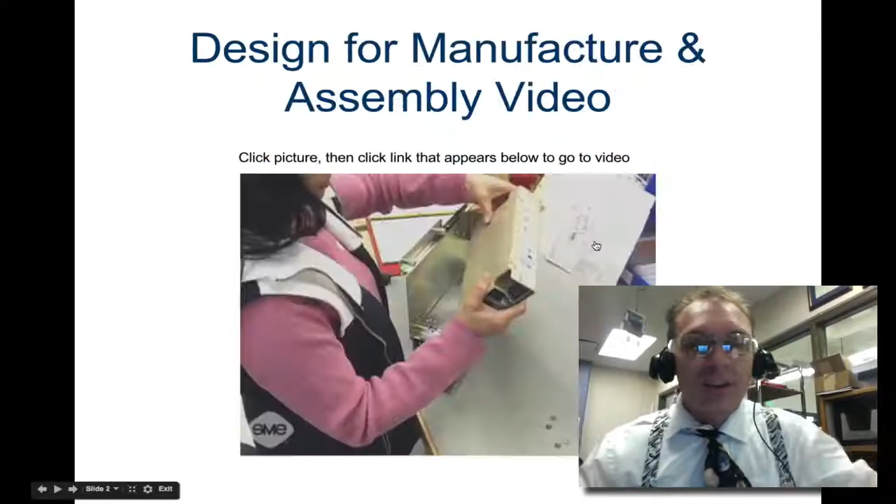Okay. Today we're going to talk about design considerations for manufacturability. Let's take a look at this video here first.

MDS SciEx of Toronto is pleased with the results it's reaped with a disciplined approach to design for manufacture and assembly. It provides us with a mechanism to ensure that the pieces do fit together. To make sure they fit together easily, MDS SciEx asks its designers to follow a few simple guidelines. Reduce the number of fasteners, both in type and their overall number. Fewer types of fasteners reduce the number of parts that the company needs to carry in inventory and track. And fewer fasteners in the product have two more benefits. Technicians spend less time inserting them, and the company needn't buy as many parts.

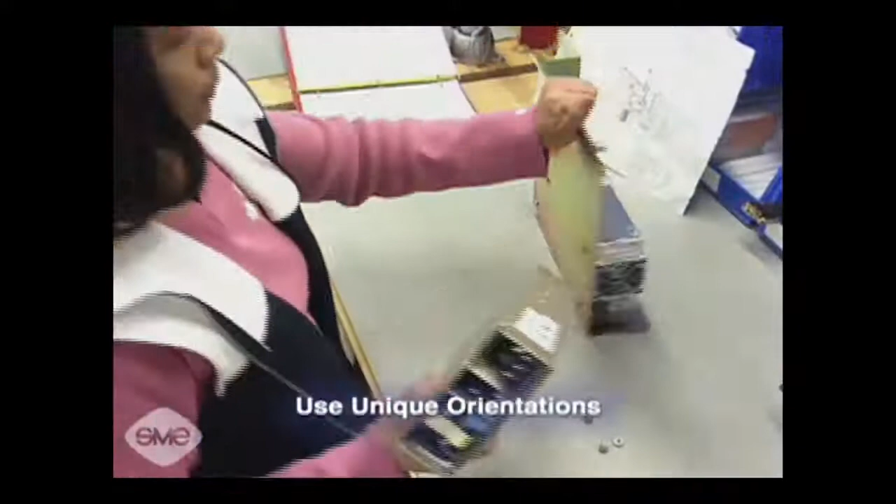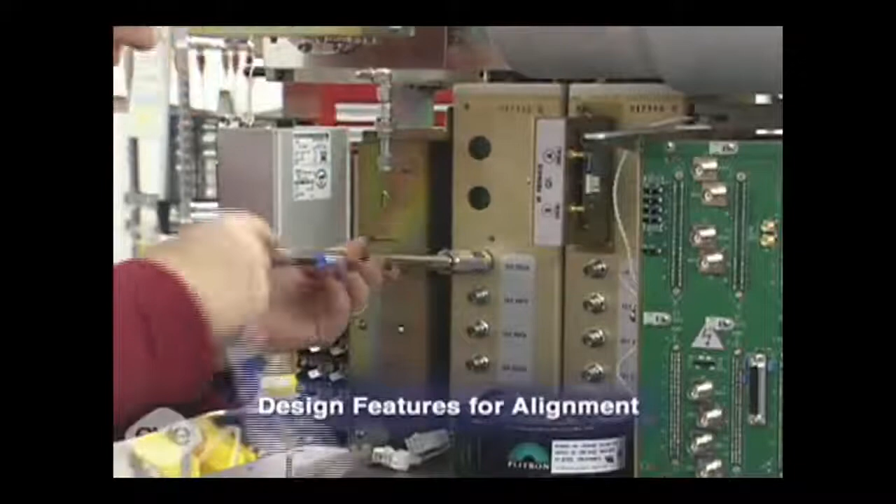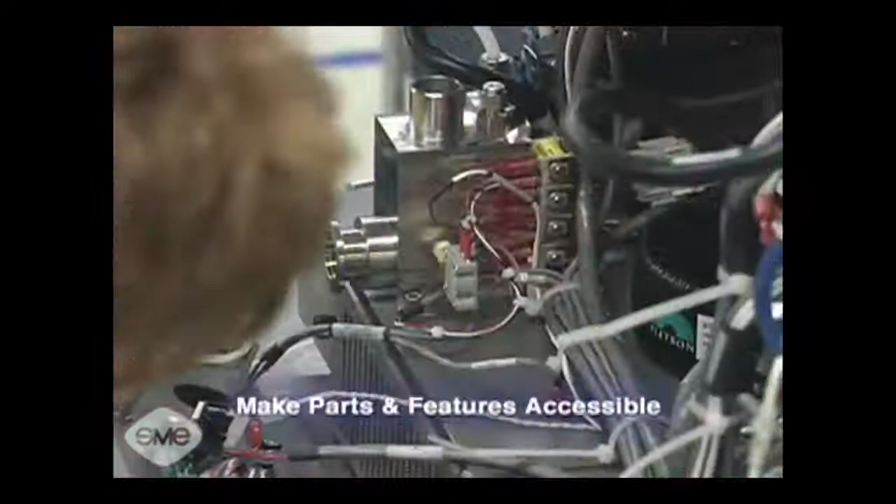Use unique orientations. Designing subassemblies to fit together in only one way is a great quality control technique. Products are assembled the right way every time. Design features for alignment. A self-aligning assembly improves quality and saves a tremendous amount of time in assembly, installation, and service. Make parts and features accessible. Easy access improves speed and quality in manufacturing and service.

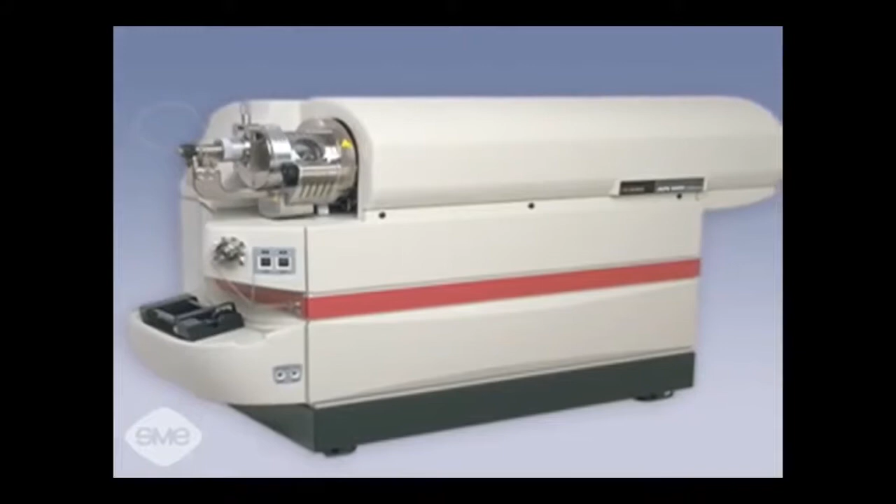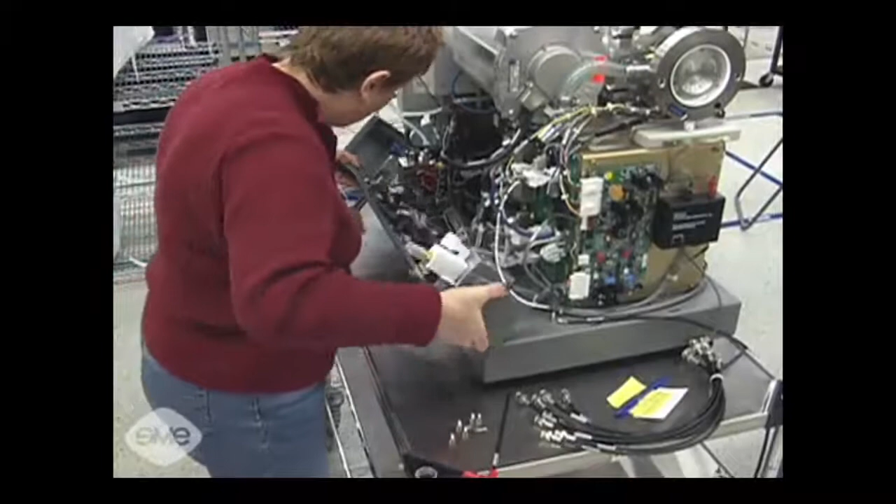A prime example of the results that following these guidelines can produce is the API 2000, a triple quad mass spectrometer that was the most powerful on the market when it was introduced by MDS SciEx. The key to this success is a modular design that is self-jigging and self-locating while containing only a few fasteners and soldered joints. The modules also go together only one way, eliminating any ambiguity in their assembly.

All right, now we're going to look at mass properties. So one thing you want to consider when you're designing things is the volume. How much raw material must be purchased when you're going to make a product?

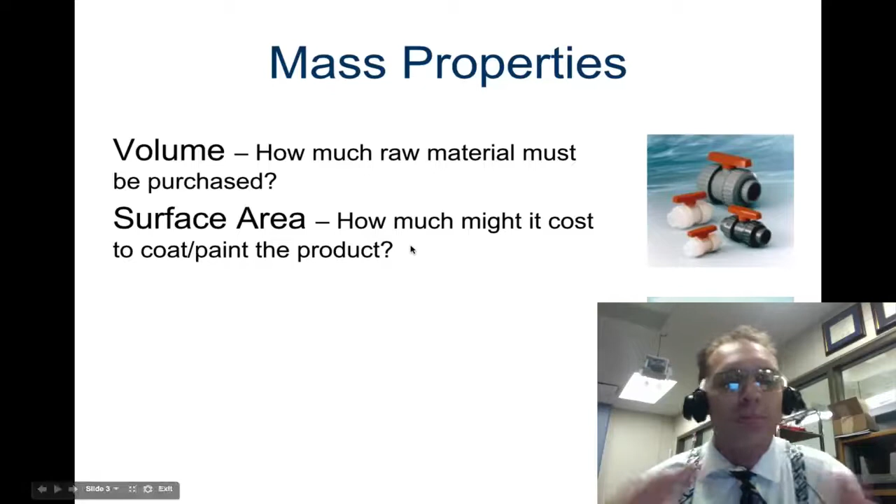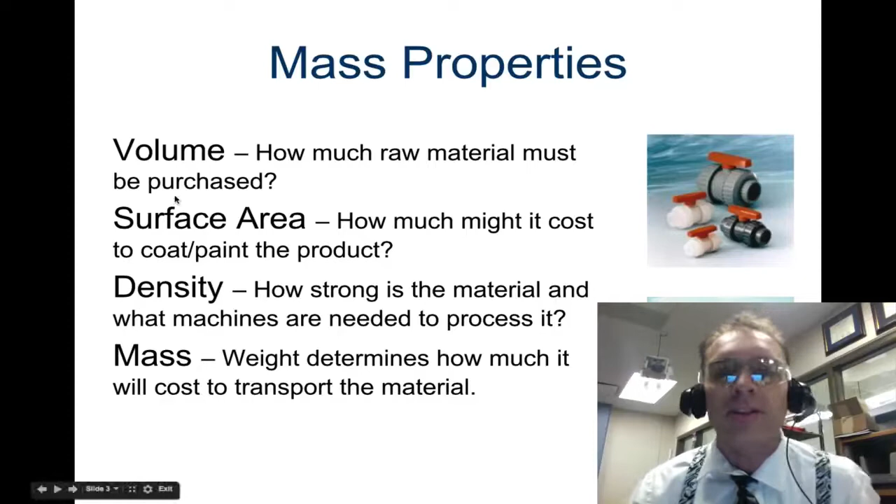Also, you should take into consideration the surface area. How much might it cost to coat or paint the surface? And then the density. How strong is the material? What machines are needed to process it? And then finally, the mass, because weight determines how much it's going to cost to transport that material. So you might want to take a little bit of notes on that. Just make sure you get that into your notes on that document that you made the other day.

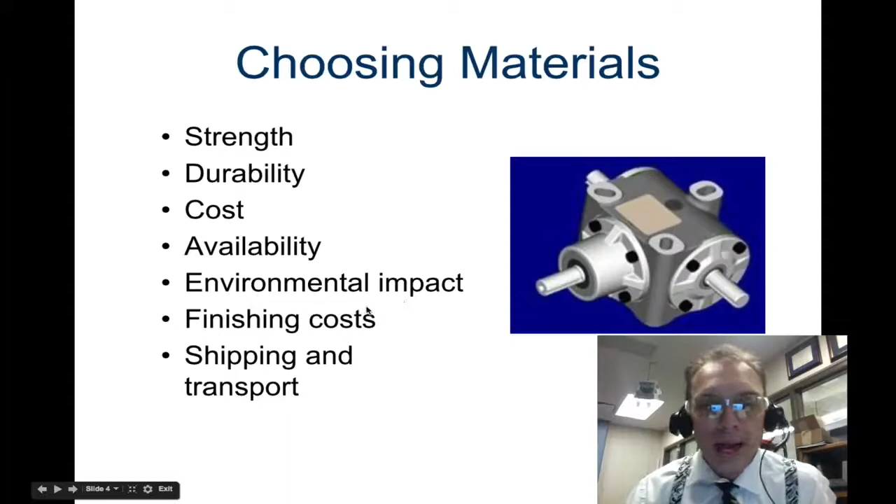So moving on, when you're choosing your materials, it's important to take into consideration the following: strength, durability, cost, availability of the material, and then environmental impact, finishing cost, shipping, and transport. So we're going to talk about all these things here.

First, looking at strength and durability, will the product be strong enough to perform its function, but not over-engineered at an increased cost? So, many times engineers will need to take into consideration the durability of the material. Are they over-engineering it? Because that would waste some money, so we don't want to do that. And so they might decide to design a product to last a certain amount of time, not forever, just to keep the material costs low.

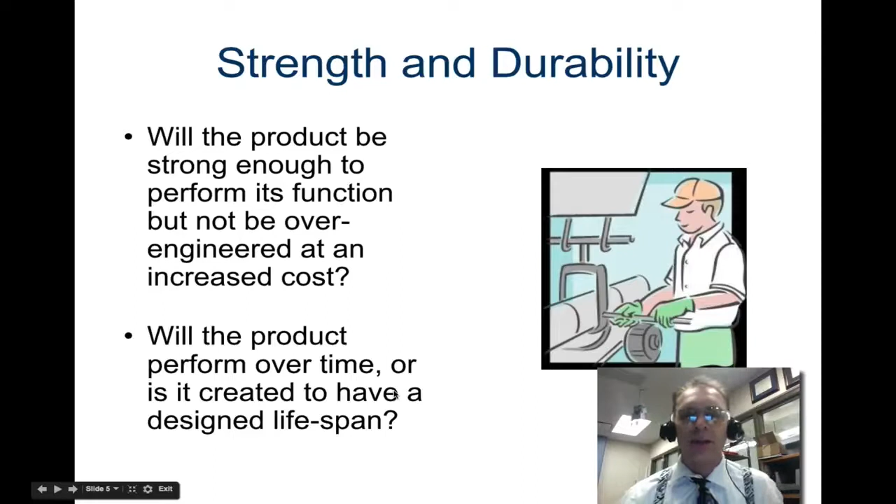So then the question is, will the product perform over time, or is it designed to have a designated lifespan? So remember that little pump toy that we were looking at the other day? That might be only designed to last maybe through a birthday party. And that's great, because then it could break, and maybe it costs just a little amount of money.

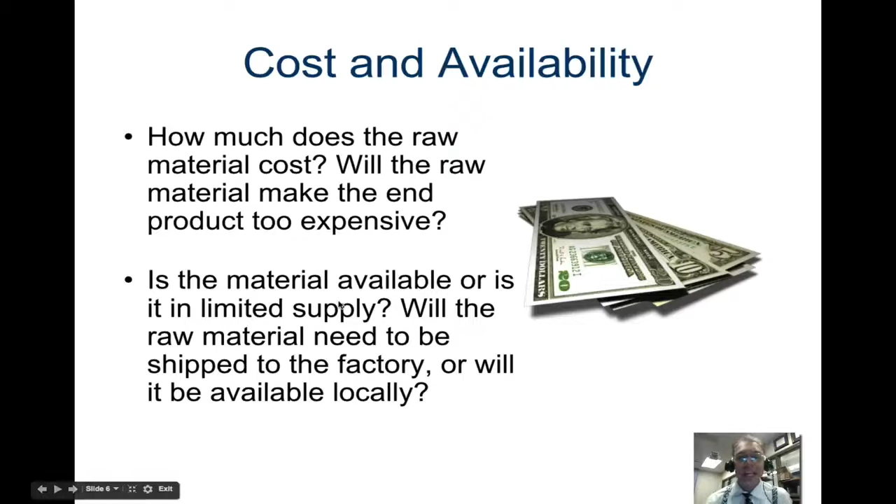Now let's look at cost and availability. So how much does the raw material cost? A big question there. Will the raw material make the end product too expensive? Another thing to look at is whether the material is available, or is it a limited supply? Will the raw material need to be shipped to the factory, or will it be available locally? So if it's cheap, but you just can't get it, then it's probably not a good material, because you just won't have it. It won't be available.

Let's look at environmental impact. Making ethical material choices is often more expensive, unfortunately, for the manufacturer.

So one thing that they need to consider is, does the manufacturing process create pollution? And many of them do. Then what will happen to the excess material from manufacturing and the product at the end of its life cycle? Is it going to end up in a landfill, or is it possible that it could be recycled? So these are some environmental impacts that an engineer might want to consider when they're designing a product.

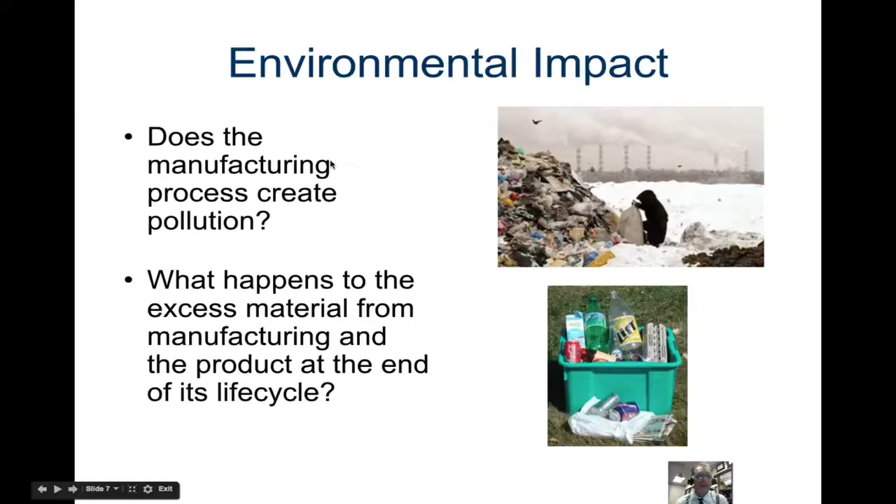And then last is shipping and transport costs. How much does the product weigh, because lighter products and lighter parts are less expensive to ship. And then what equipment is required to move and manipulate the parts during manufacturing? If you have really heavy parts, it's going to take some pretty hefty and strong machinery to move that stuff.

If you have a really large part but it's light and you want to ship it with a plane, there's only so much space in those planes. You know, you've been on one of those before maybe, and so you know that it would cost more to ship it because you can't get as much stuff in the plane with big parts in there.

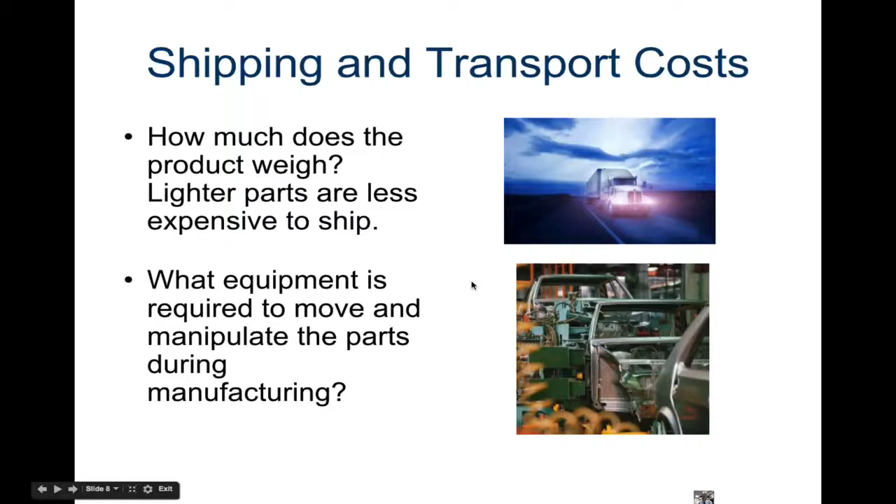So let's take a look at this ergonomic safety video. So the last thing to maybe add some notes on is the consideration that manufacturers have to think about for the safety of their employees. You'll see a little bit on this, and this little thing, how it needs to be in the right position. Buttons can't be too hard to press, so you might want to add some of those notes into your presentation.

I think that Proactive is the key word at John Deere Davenport Works in Davenport, Iowa. John Deere is the world's leading producer of agricultural equipment and a major producer of industrial equipment, employing about 34,000 people. When it comes to ergonomics and safety, the safety director says it's as simple as a walk through the plant. But I really think that it's really important that we spend time on the floor with our employees, asking them, what can we do to make your job safer?

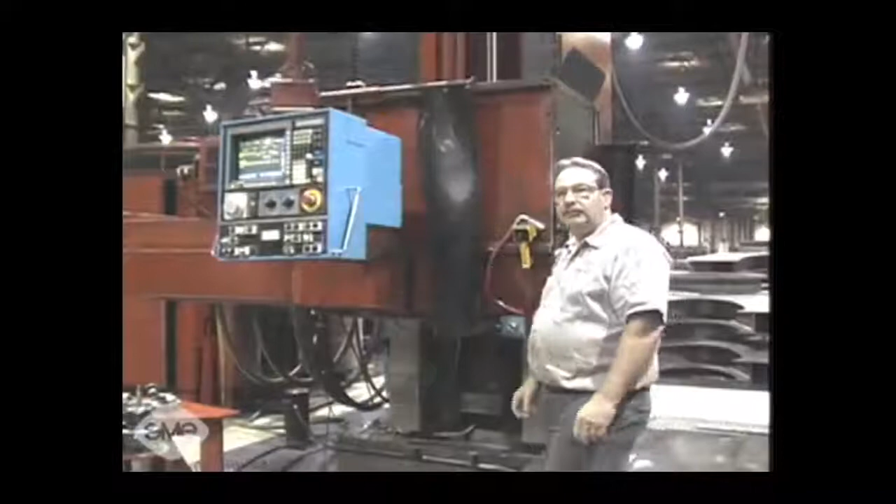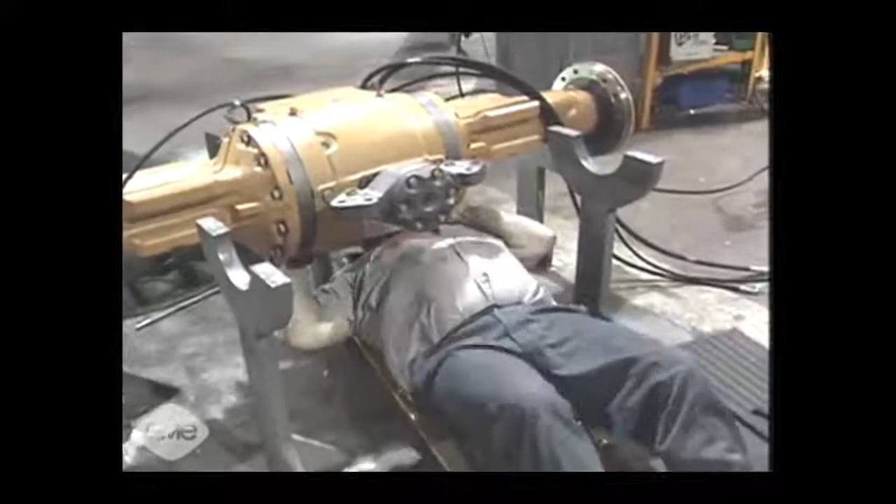On his daily walks through the plant, he can identify ergonomic and safety concerns before they become a problem. By talking with employees, he taps into a ready resource of practical information. When a new process or product is introduced, the workforce is informed and encouraged to get involved in the changes. The facility's approach to problems is to rank any safety concern by the following criteria: force, posture, repetition. The jobs ranking highest in these areas will get attention the fastest.

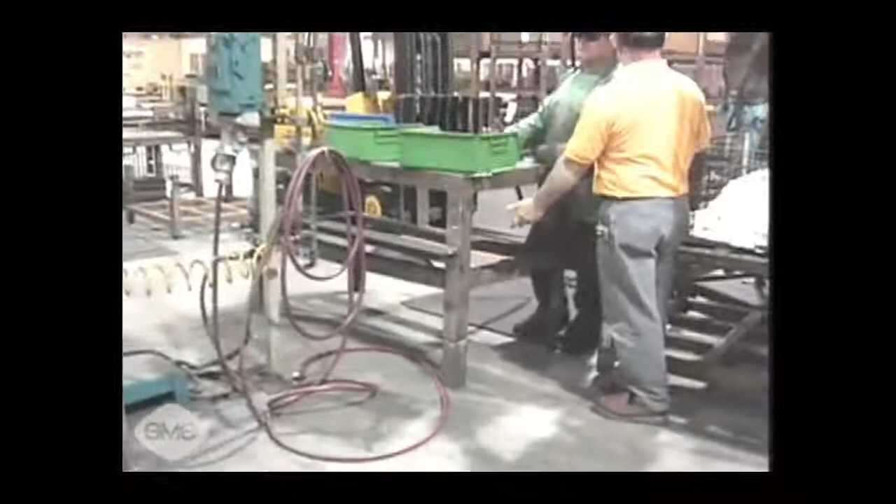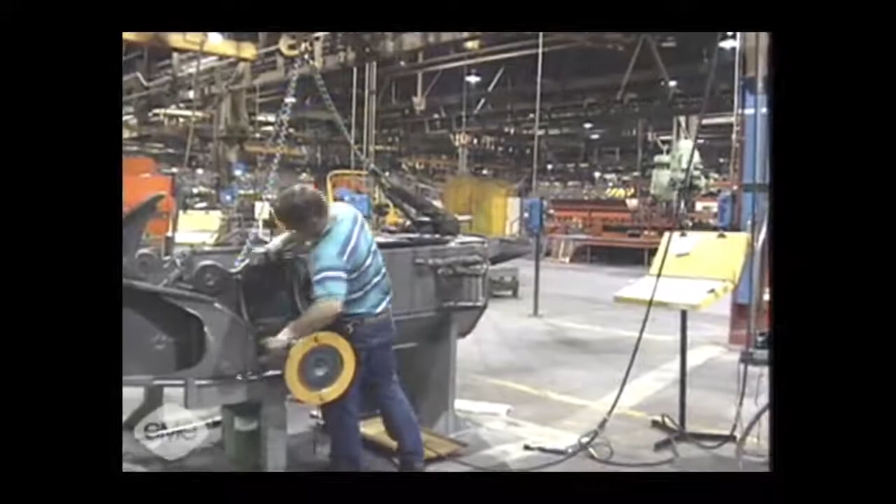Solving existing problems continues to be a major focus of the safety department. One of the first issues addressed was a problem with air hoses stored on the floor. It was a safety concern because workers would trip over the hoses, and if cut, the hose could release high-pressure air, a potentially dangerous situation. There was an ergonomic concern as well. The air hoses run the pneumatic equipment. Every time a hose was used, it was manually lifted and moved. Employees complained of upper back problems.

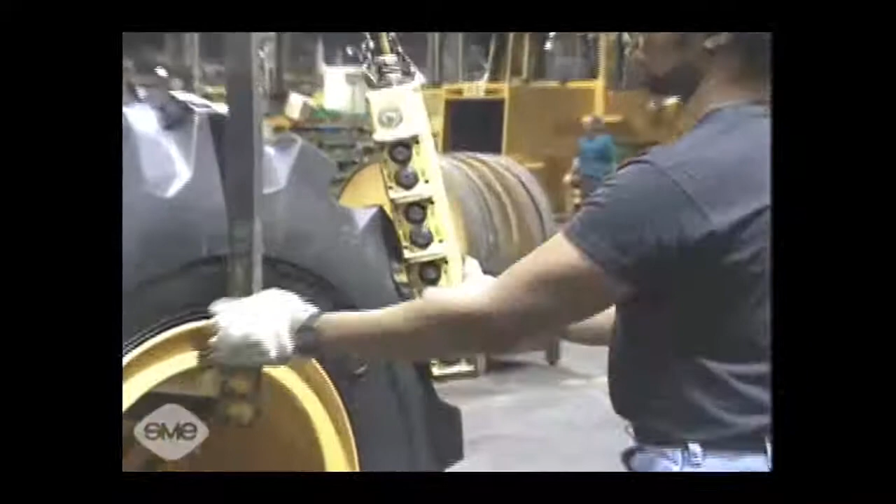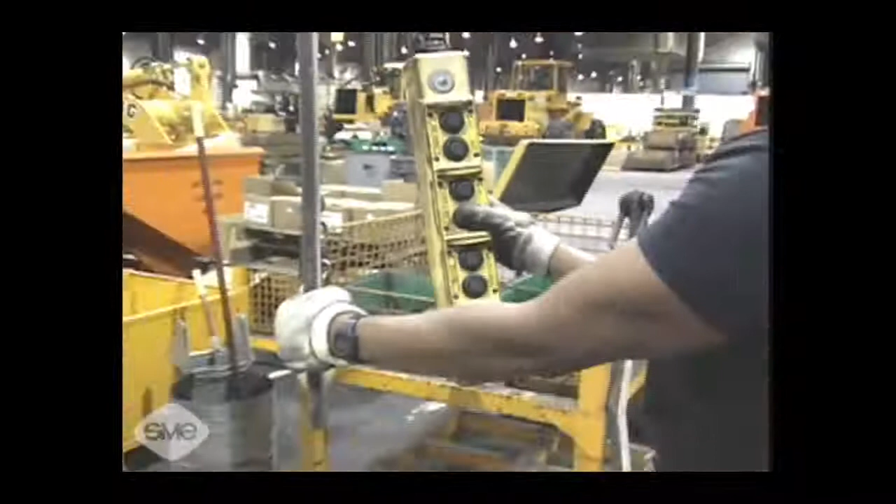So what we really wanted to do was take our hoses and get them up off the floor. So we designed in-house here a spring-loaded device which actually holds the hose up and it retracts, not in a coil, but similar to that of a fishing pole. Another ergonomic project was replacing existing hoist pendants. The hoist pendant used to guide heavy products was almost as difficult to maneuver as the item being moved. The pendant was 4 inches by 4 inches and weighed about 13 pounds. To push the buttons required 5 to 10 pounds of pressure. Operators complained of thumb cramps and stiffness.

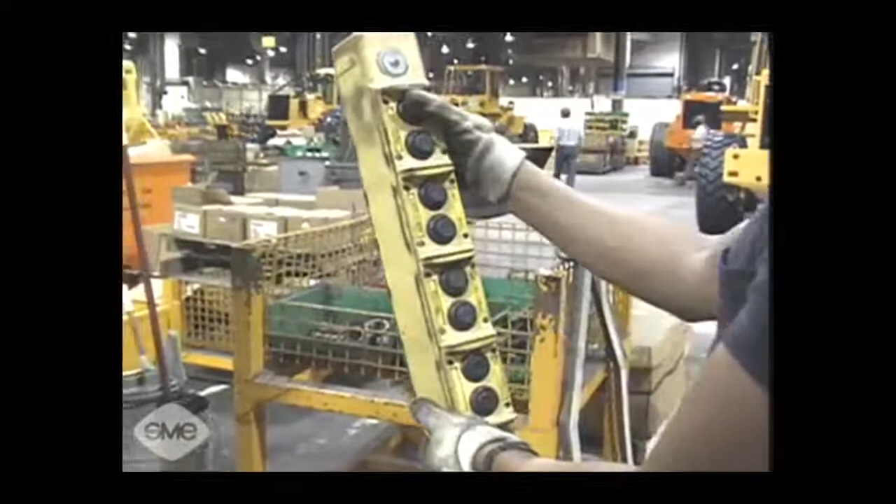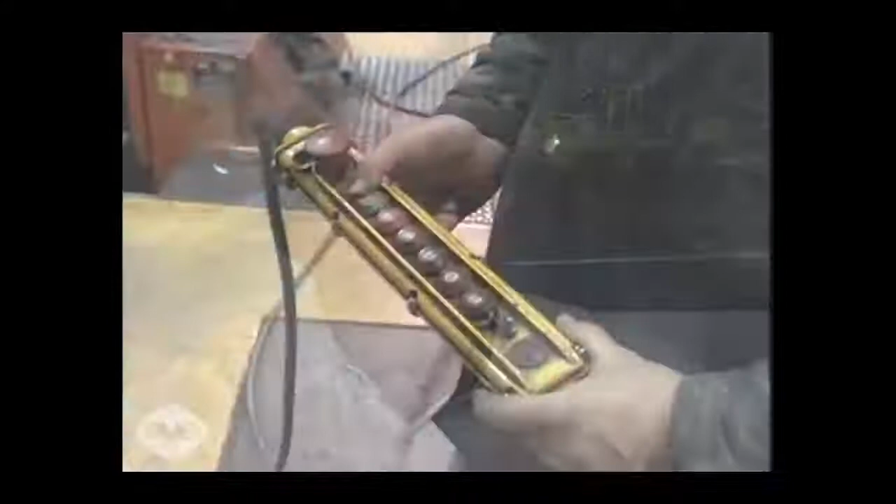So by looking and challenging some of our suppliers, we were able to find a pendant available on the market that came pre-wired and cost almost exactly the same as the large pendant and had great durability. The new pendants are smaller, lighter, and easy to hold.